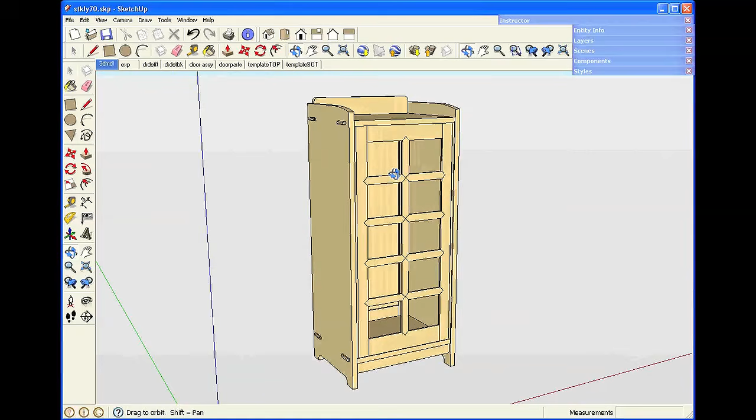In this session, we're going to learn about SketchUp. We've been using SketchUp at Popular Woodworking Magazine for a few years now, and it's really been a fantastic tool for us. We use it to plan projects before we build them, and as a basis for illustrations you see in print in the magazine. It effectively lets us build things twice. We build it in the model, we can visualize how things go together, see it in 3 dimensions, come in close to get details, and check the sizes of parts. We can do all of this before we ever cut any wood. It's fast, it's efficient, it's made us better woodworkers. It's a tremendous visualization tool, and it's also a wealth of information.

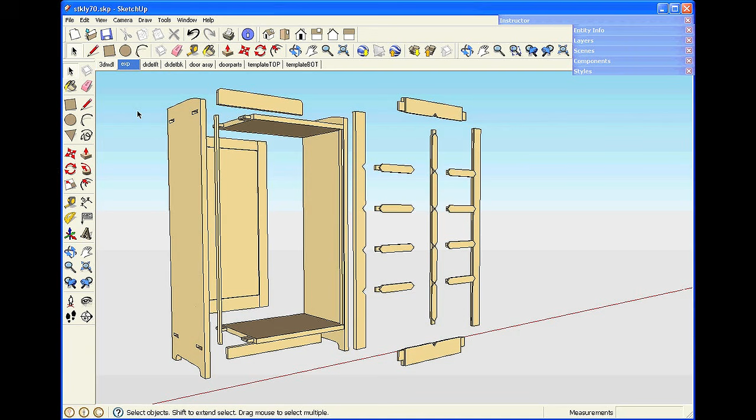In this cabinet, I know the size of every piece and every part and how all the parts fit together. I can also use the information in the completed model and generate a number of different views. All of these views are fast to make because I'm not drawing anything over, I'm simply pulling parts from the completed model. This exploded view, for example, was made by copying the model and then moving the parts around. I can also take a close look at details and share these, seeing from the front and the back, and again this doesn't take much time. I'm just taking snapshots of different parts of the model and different points of view.

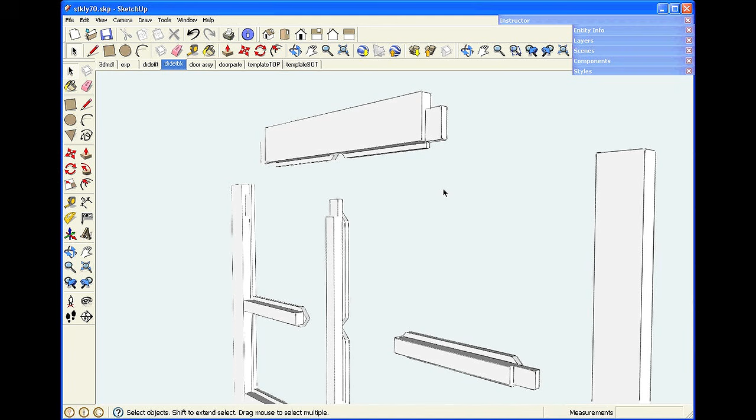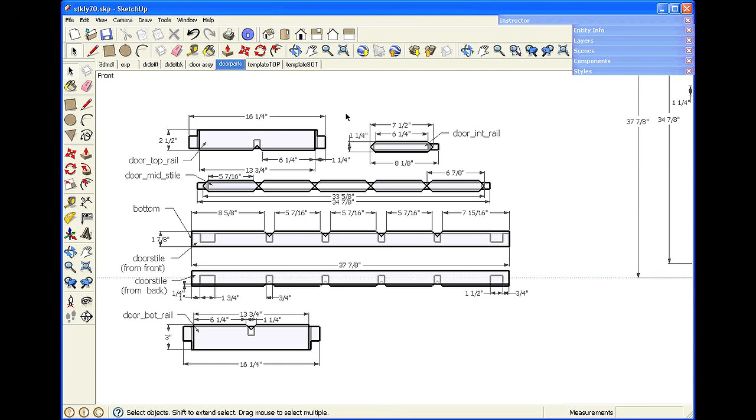When it comes time to head to the shop, I can generate and print out detailed drawings with dimensions, such as this showing the door assembly. Because I have all of the parts saved in the file, I can also pull parts into another sheet, print that out, and I have a cut list showing all the parts, all the dimensions, where the joints are, what size they are. It's a tremendous tool to help build efficiently and to build accurately.

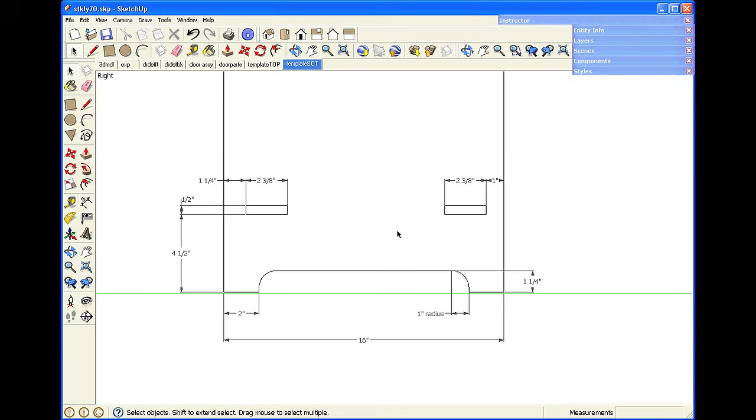Another great use we've found is to make full-size templates. This is a close look at the bottom of the cabinet. If I print this at full size, I can get the shape of the side, I can get the through mortise, I've got the locations, I also have the sizes of them. I can print this at full size, take it out to the shop, glue it down to a piece of wood, and make a template to make these parts accurately.

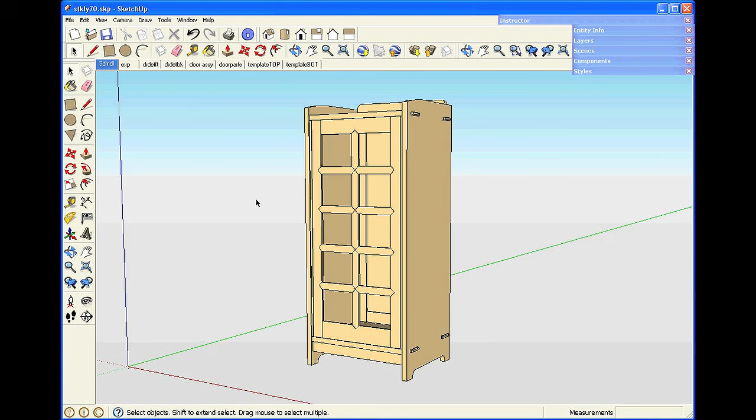All in all, SketchUp has made us better woodworkers, and we think every woodworker can benefit from learning how to use this program. That's the good news about SketchUp. The bad news is it takes a little while to learn, and you have to practice it. SketchUp is a fairly intuitive program, but there are some quirks to it, and sometimes the obvious ways to do things aren't the most efficient ways. What we're going to do in this series of videos is share with you the things that we've learned so that you can model efficiently and accurately.

One of the first hurdles to overcome when you're learning SketchUp is you need to learn 2 distinct sets of skills. You need to learn how to draw, but you also need to learn to navigate around your drawing. It's difficult to learn how to zoom and pan and orbit while you're learning to draw. A lot of people get slowed down by this. They become reluctant to zoom because they're trying to model at the same time. So one of the things I've found is you're better off to get an existing model, and spend some time navigating around that before you begin to learn how to draw.

There are several sources online for models. You can go to sketchup.google.com, and you can also go to popularwoodworking.com/SketchUp. You can even access models within the SketchUp program. If you go up to the File menu, click on 3D Warehouse, and Get Models, you'll be connected to this online resource. In the search box, you just type in a term. I'm looking for a hay rake table that we featured in Popular Woodworking Magazine a few years ago. The search comes up, and I'm presented with a model.

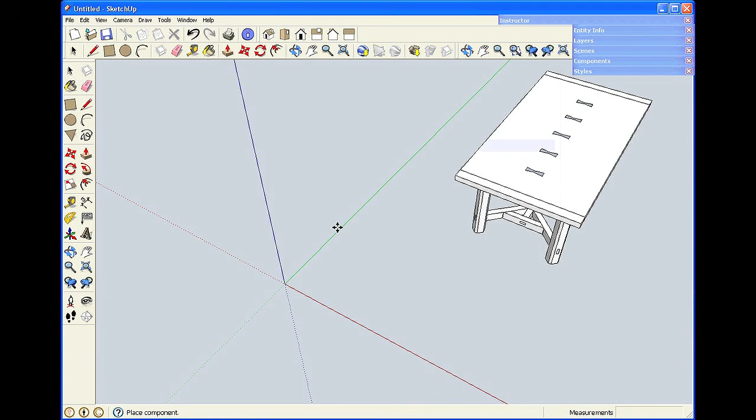I can take a preview of it in 3 dimensions, and I can download it by clicking the tab that says Download Model. It'll ask me if I want to load it directly into the SketchUp model, and when I click Yes, that window closes and the model from the 3D warehouse appears. Now I've got something to look at.

I can practice the navigation skills in SketchUp. One of the curious things about SketchUp is that the obvious ways of doing things aren't always the best way. The navigation tools are up here on the toolbar. There's Orbit, Pan, and Zoom. And it seems like that would be the simple way to access them, but there's a better way.

If you have a 3-button scroll wheel mouse, the scroll wheel contains all of the navigation functions for SketchUp. If you roll the wheel up, it zooms in. If you roll it back, it zooms out. If you press down the scroll wheel and move the mouse around, then you orbit. You can see things from underneath or at any angle. And if you hold down the Shift key while you're orbiting, that invokes the Pan command, and that lets you move back and forth.

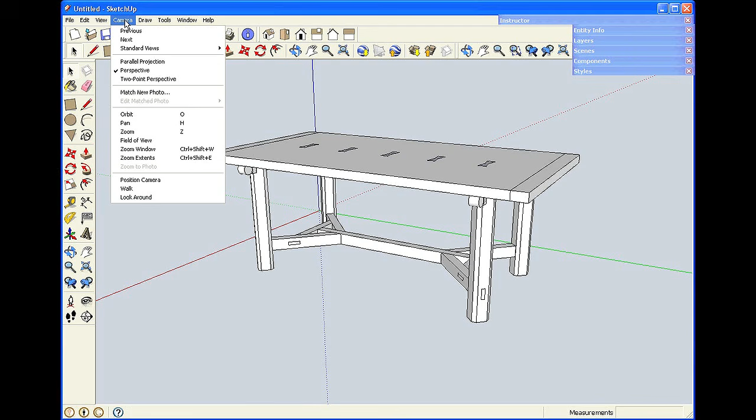The navigation tools are also under the camera menu. And this is a slow way to get there, though. You really need to work on the skills to use the mouse functions to be efficient.

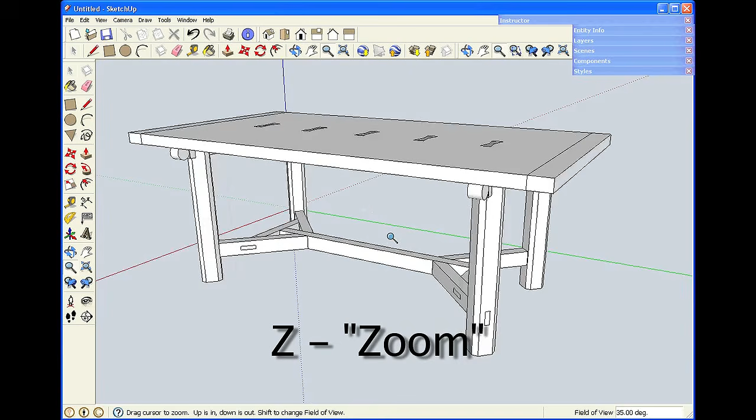There are also keyboard shortcuts for the navigation commands. O for orbit, H for pan, and Z for zoom. Now, one of the things while you're in a navigation command, if you right click, a menu pops up and the other commands become available.

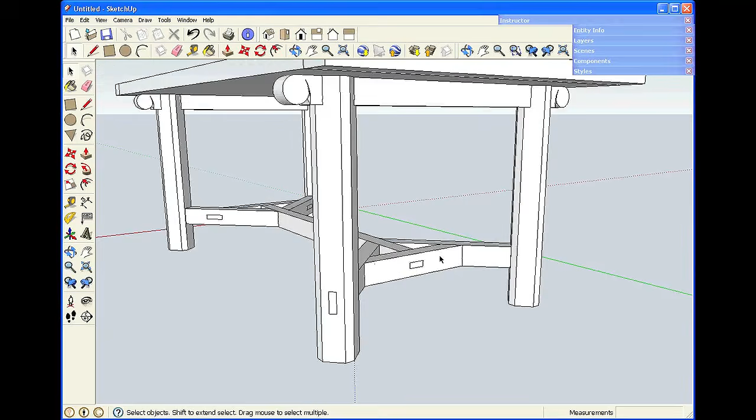The other thing about the navigation commands is they're transparent. You can use them in the middle of moving something or drawing something. This is an important feature because often you need to come in very close to click on a specific point and then back out to see more of the model.

One of the other features on the toolbar is Zoom Extents. If you're in close, you can get lost in the model sometimes. Zoom Extents backs up your point of view to see the entire model.

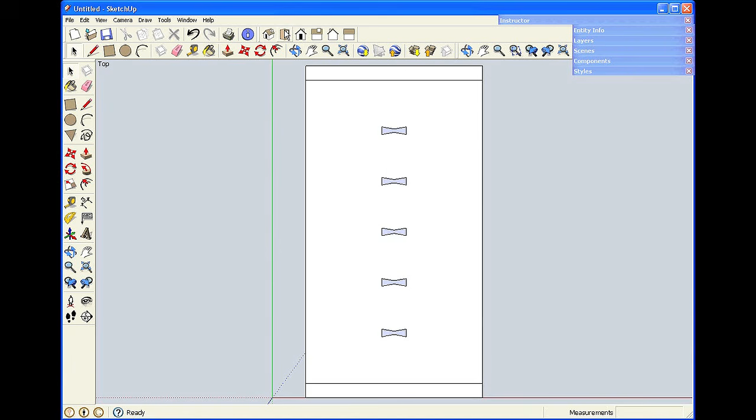Another feature is the standard views. These are familiar if you're used to 2-dimensional drawings. This is a plan view and a front elevation and a side elevation. You also have an isometric view available.

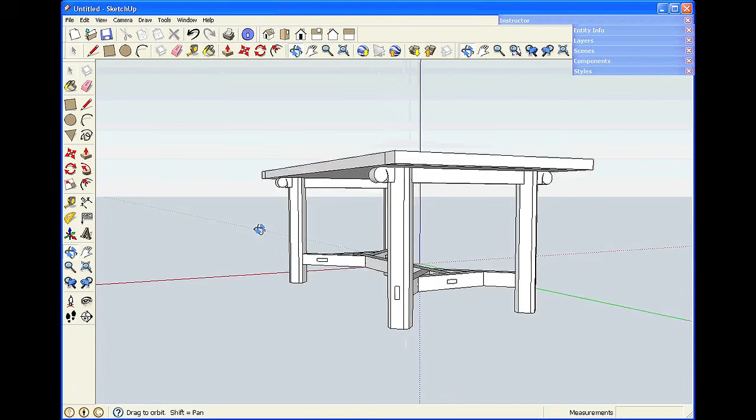So I suggest you get a model, spend a half hour or so working your way around it. Look at it from different sides, zoom in to take a look at details, zoom back out, and pan around. When you're comfortable with how to get around a model, then you can start learning how to draw.

To model efficiently in SketchUp, you need a thorough understanding of the basic controls, how things are made, and also how the program works. Let's start by understanding what we're seeing on screen and what the SketchUp world is really like.

This darker area is a flat horizontal surface. It's called the ground plane. These 3 colored lines are called axes. The blue axis is a vertical direction. The green and red axes are horizontal directions. Directions in SketchUp are referred to by colors because as you spin around, you can change, and what was right and left now becomes front and back.

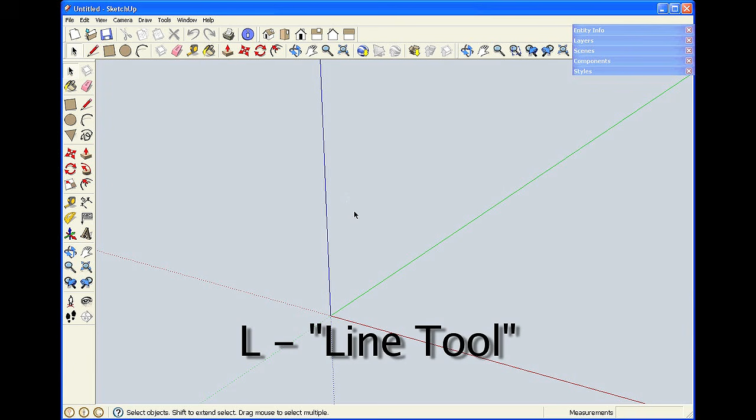The basic tool for drawing is called the line tool. It's represented by a pencil. You can pick it from the toolbar. It's also under the Tools menu, and there's a keyboard shortcut, the letter L. You click on a point to start a line, go out a certain distance, and click again to stop it.

One of the things you may notice is the line is a red color, and a little tag appears that says from point or on red axis. And those are aids in the program that help me keep in the right direction.

The reason that this is important is everything in SketchUp is in perspective because it's in 3 dimensions. This rectangle really has square corners, but because I'm looking at it in perspective, it doesn't appear that way. If you have a lot of experience drawing on a drafting board or in a 2-dimensional CAD program, this can get confusing when you work in SketchUp because your hand and eye coordination is probably trained to draw what looks square to you on the screen.

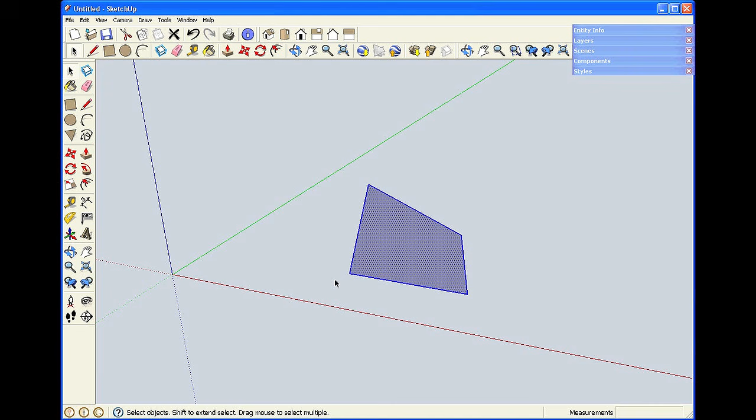If you see a black line, that means you're not parallel to the axis and you're somewhere out in space. And it can be very confusing, and you'll make very odd shaped things that don't match what you want to make. So as you draw, take your time, let these tips appear. Watch for the colors to see that you're on axis. Pretty soon your hand and eye coordination will adapt, and you'll get used to looking to the colors without thinking about them.

The other aid, and you can see these appearing, are called snap inferences. When I approach the end of a line or the middle of a line, a little dot appears, and that lets me know I'm going to be drawing exactly from that point. As I move along, a little tag appears letting me know I'm on axis. When I get above another point, it shows me that I'm matching up to it.

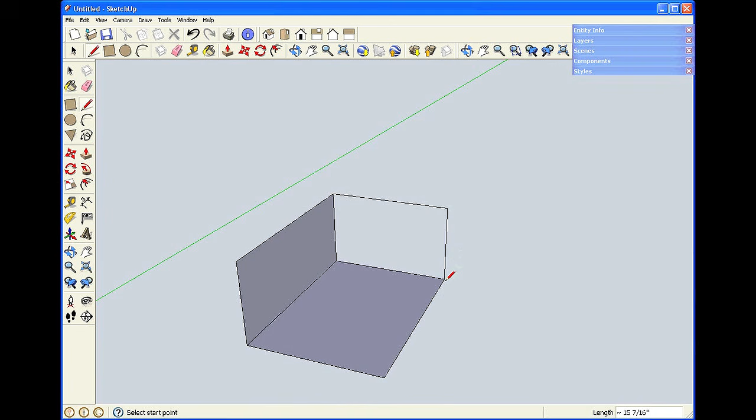That lets me draw a nice square straight line.

Another important feature of the program is called the measurements window, down in the lower right hand corner of the screen. As I draw a line to control the length, you'll notice the numbers change as the line gets longer. What I don't want to do is try to jiggle the mouse and hit a certain number. Instead, after I start drawing, I simply type in a measurement and hit the enter key. As I start the line, just type, I don't have to click in the window or anything, and hit enter, and that makes the line the correct length.

This is important because other features, such as moving, depend on an accurate number in the measurements window.

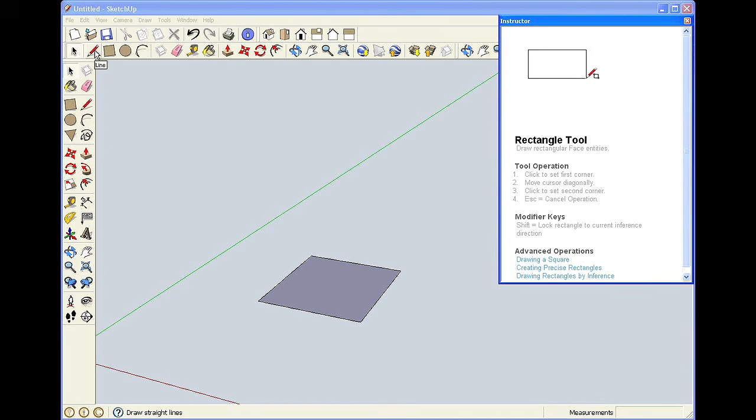One of the good features of SketchUp when you're beginning is the instructor window. From the Windows menu, I click and open the instructor window. It describes and tells about the operation of each tool you select. As you change the tool selection, the instructions change also, giving you basic information about how each tool functions.

The select tool is important because for a lot of operations, such as moving an object, it's better to select it first. To get a single object, you just click on it and it turns blue. If you click another object, it deselects the first one. To select more than one object, you hold down the Shift key. You'll see a little plus and minus sign appear by the cursor, and that lets you add to the group. When you have the whole group, you can move them in one shot.

You can also select objects by drawing a box around them. There are two distinct ways this function works. If I draw a box from left to right, everything that's entirely in the box is selected. This is called a bounding box. As you can see here, I don't have the entire square, only these two lines are selected. This helps later on to select certain points.

Now if I come the other way, from right to left, with a crossing box, it selects anything that touches the extents of that box.

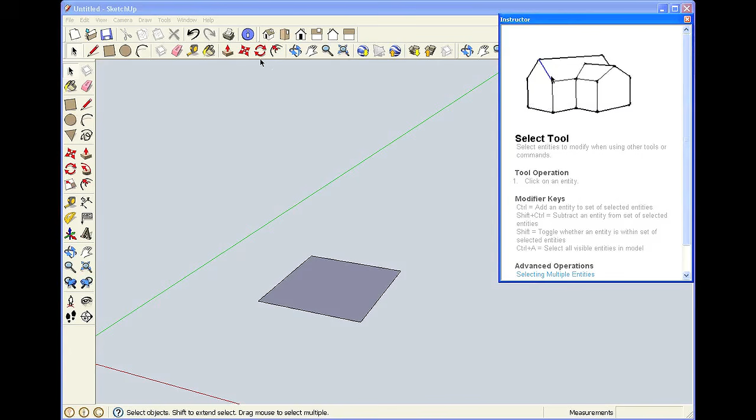Looking back at the instructor window, if I click on the title bar, it collapses and doesn't take up space. If I click the red X, that closes it, and I'll need to return to the window menu to display it again. I recommend keeping it handy as you learn, and when you get to different commands, you can open the window up and explore what the function is.

Now within SketchUp, no matter how complex an object is, it can only be one of two things: it can either be an edge, which we also call a line, or it can be a face.

Edges or lines have a length, but they don't have any thickness. When you enclose an area with lines, it forms a face. The face is the area in between. Now the face depends on the lines to exist. If I take one of the lines away, the face ceases to exist. If I redraw the line, it comes back.

Now that I've drawn some things, I need to know how to remove things as well. There are two separate ways. Again, the obvious way, it looks like the eraser tool would be the thing to use. The eraser tool, however, is a little difficult to use. There's a tiny pick box on the end of it, and an object needs to be within that little box to be erased.

The other oddity of the erase tool is that it only works on edges, it doesn't work on faces. So to remove a face, I use the alternate method for deleting an object, and that's the select tool. Select it with the select arrow and hit the delete key. Often this is quicker and easier than using the eraser.

When you first install SketchUp, you only have a minimal amount of tools available, and the program is set up for architecture rather than for woodworking. So we need to take a few minutes and get things set the way we want them so that we can operate efficiently. The first thing we want to do is set some preferences.

So we go to the Window menu and check Preferences. Now on a Mac, this procedure is a little bit different, you'll find it under the SketchUp menu. The first thing to look at in the list is Drawing.

Here we have click style, which controls the way lines are drawn. You may have a preference if you've used another graphics program. For now, I would leave it at Auto Detect and check Continue Line Drawing. More importantly, make sure you have Display Crosshairs checked. This puts a colored indicator for the axis direction on your mouse cursor as you draw, and this is a tremendous help for keeping on track.

The next thing to look at is OpenGL. If you have an older computer and you're having problems with your video display, checking and unchecking these boxes can help with that. The last thing to look at is the template.

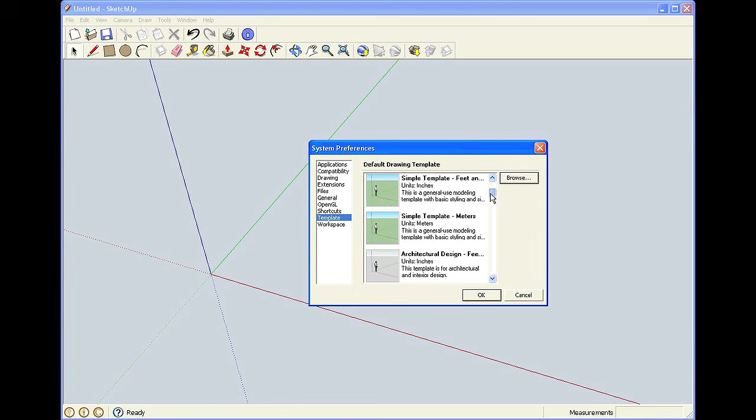The templates are sets of dimensions and the way the background displays for different applications. Most of these are for architecture, Google Earth, or engineering. We want to scroll way down the menu, find Product Design and Woodworking, with Units in Inches. Click OK, and that saves the system preferences for us.

Next we'll look at Window and Model Info. In here we want to look at the Dimensions window. Later on when we get to Dimensions, this is where we can pick a font, a style for the arrow, and how to align dimensions.

Down at the bottom is Units, and we want to set this for fractional. Architectural is feet and inches, decimal is in hundredths. Generally in woodworking we want to stay with fractions. I set the precision to a 64th, and I uncheck Enable Length Snapping. When we get to working with angles, we may need to change these settings, but for now 0.0 is okay. Then we can close the Model Info window.

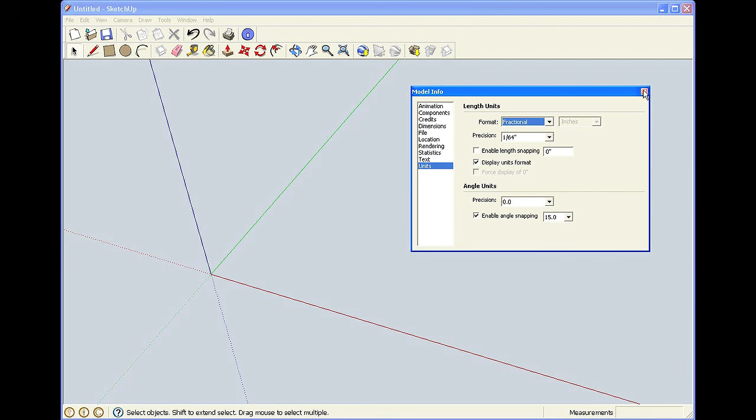Of course, as woodworkers, we need as many tools as we can possibly get. So up at the View menu, under Toolbars, here's a large tool set. This includes more tools than we have available when we first start out. We also want to select the Camera toolbar, which includes some zoom features and functions.

The Views toolbar - these are the little houses that'll give us standard views. Now on a Mac, this setup is a little bit different. You want to look for Customize Toolbar, and that will give you the option to drag groups of icons to your toolbar and set them up the way you want them.

The other feature of SketchUp is windows and palettes that we can open and use as we work with the program. First of these is Entity Info. Then we want to select Components, Styles, Scenes, and Layers. Now we won't use these right away, but it's nice to have them available.

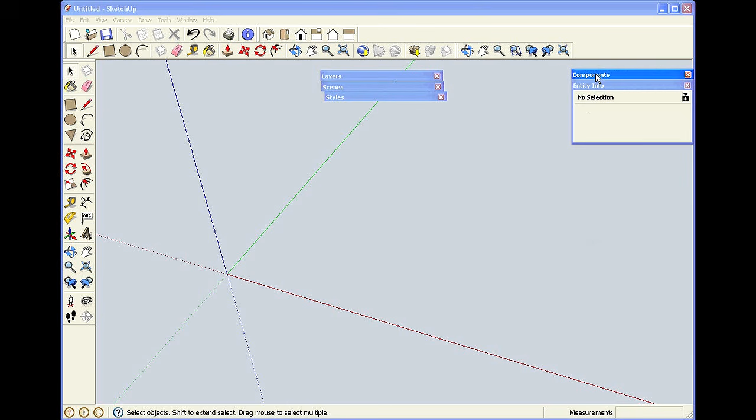With these windows, if you click on the name tag, they collapse, and you can move them around the screen. They'll also stick to each other, so I put them together as a group, leaving them in the upper right hand corner of the screen.

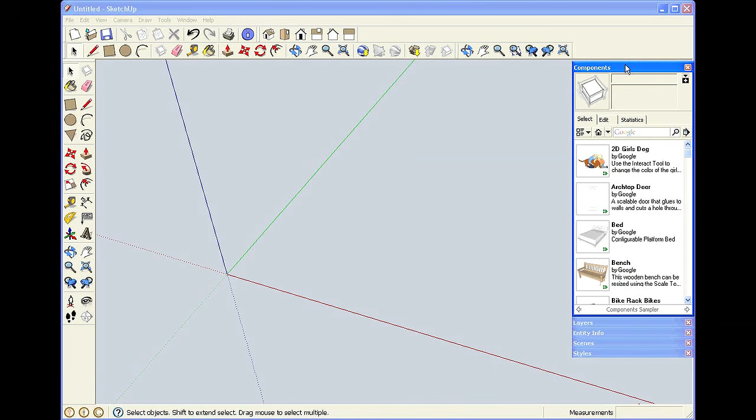To use one, you click on the name, it opens up. You can explore the options, work with what's in there, and then tuck it back out of the way.

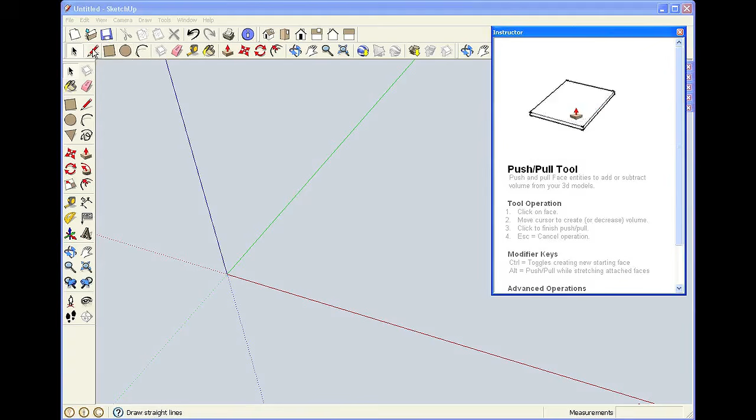The most important window at this point in learning the program is the instructor window. We mentioned this before, but it's nice to leave available. It will tell you with each tool, as you select it, how it works, as well as available options for using the tool. The blue titles down here take you to online help if you're connected to the internet.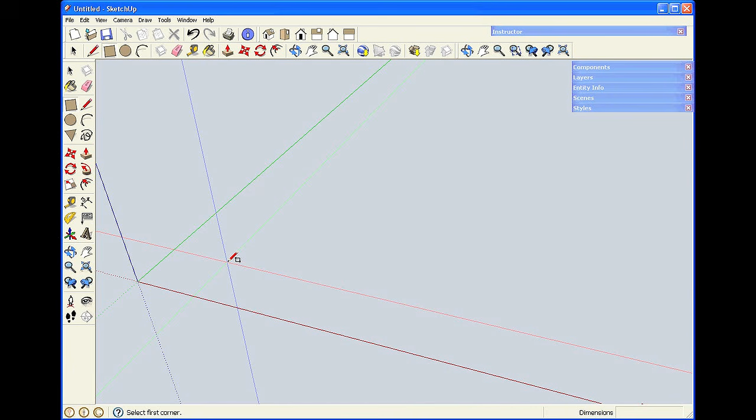Now when I make a rectangle, I want to watch for the same things I did when using the pencil. I click on a start point. I want to keep my axis references together. I also want to be able to control the measurements. I can do this down in the dimensions window, but because I have both width and length, I need to type two numbers - the first number, then a comma, then the second - and that gives me a rectangle the size I want.

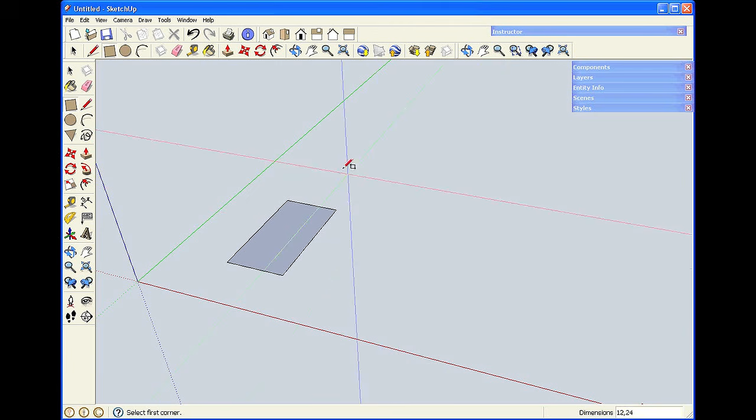The same direction inferences and snap inferences also apply with rectangles as they did with the pencil. But I'm drawing much faster because I'm drawing several lines in a face at one time.

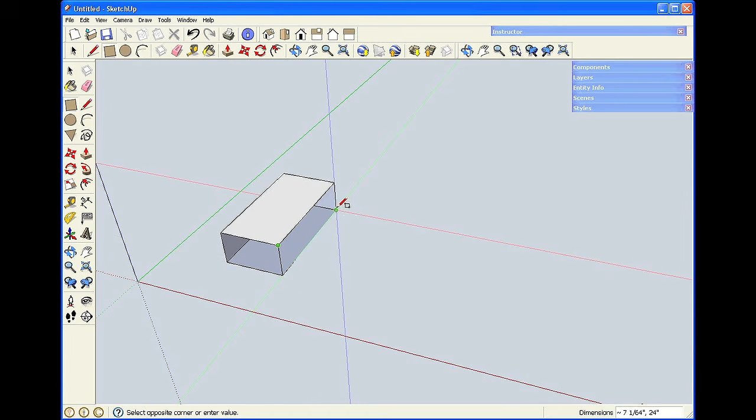This basic box shape is the key to making things in SketchUp. It looks like a piece of wood, and we can do it with the rectangle tool or with the pencil. But just as the rectangle is more efficient than the pencil, there's another way to make a box that is even more efficient.

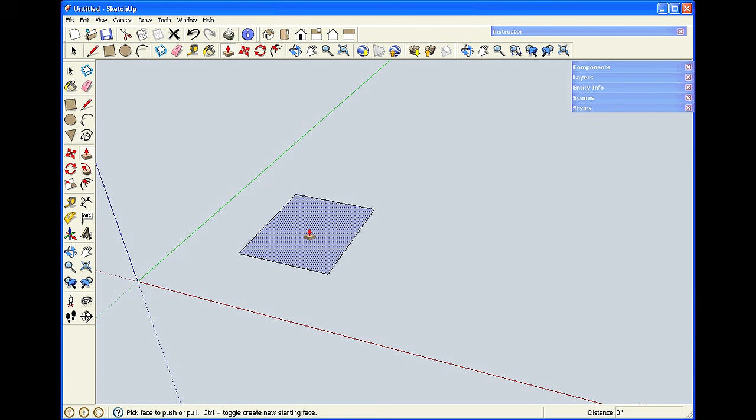This is a tool called push-pull. I get push-pull, I put it over a face on the model, and then click and drag the mouse.

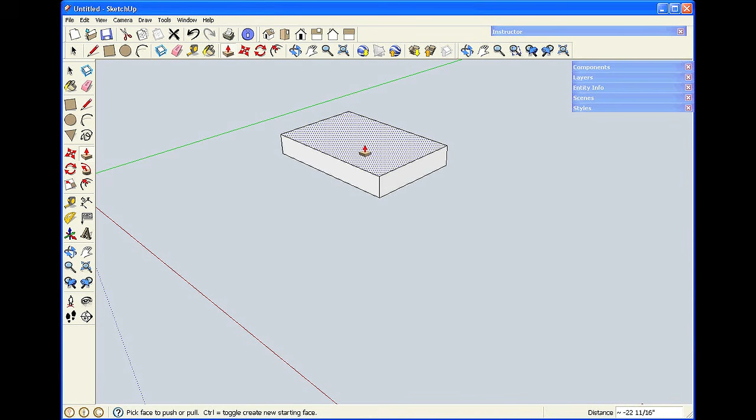This makes a flat rectangle into what looks like a solid object. I can also use push-pull to change the size of something once I've drawn it. I can stretch it in length, I can shorten it, I can make it taller, I can make it longer.

Push-pull will only go in the direction that's 90 degrees to the face I select. Again, there are inferences for snaps and directions within the program that will help out.

For example, I want to make this rectangle into a box the same height as this one. When I take push-pull, it's locked into going vertically, so I can come over to the other rectangle.

When I see the references appear, I know they're going to be the same height. I can also control the distance of an extrusion by typing a number in the measurements window.

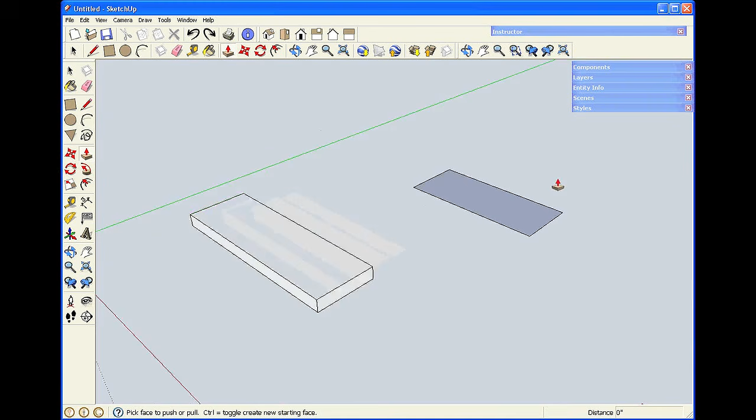Once I start, I head in the direction I want, hit the number, hit the enter key, and it makes it the desired length.

Now, one of the early problems we need to resolve is everything that we've drawn is still a face or a line. This isn't a solid piece of wood, it's a collection of lines and faces.

So if I want to work with something, if I want to move part of it, it stretches what it's connected to. Everything in SketchUp, when it's an individual object, is sticky.

This edge is attached to these faces, so if I move the edge, the faces stretch with it. Sometimes this can be handy, but most of the time it's not what we want to do.

It particularly gets to be a problem if I want to put one piece on top of another one. I can select it and move it.

When I go to move it again, it's stuck to the piece below it, and it stretches it out when I try to move it. The way to overcome this is by combining objects.

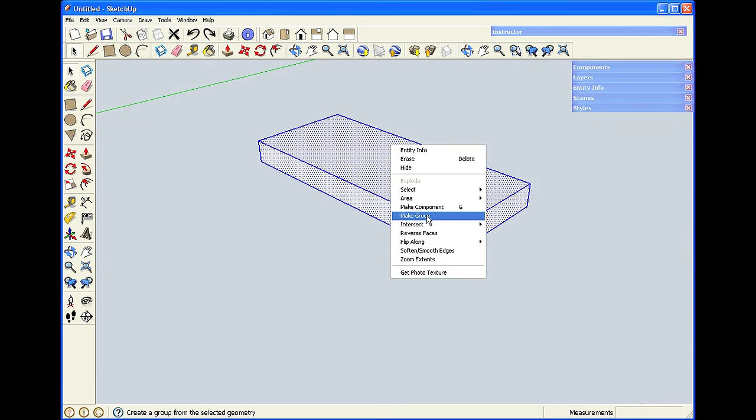After I have a group of objects selected, if I right-click, this menu pops up, and Make Group is one of the options. Make Group combines the objects.

When I click on it now, instead of just selecting a single face or an edge, it selects the entire object. This makes it easier for the program to think of things.

It's thinking of one block, much the way that we would think of one piece of wood, instead of a collection of individual lines and faces.

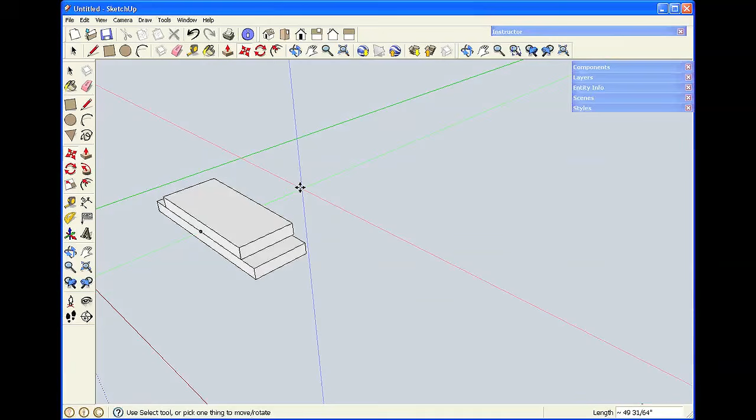The other feature of groups is they don't stick to anything except each other. So now I can move things independently.

Which brings us to the functions of the Move tool. Moving is very important and it's used very often. This is the icon on the toolbar.

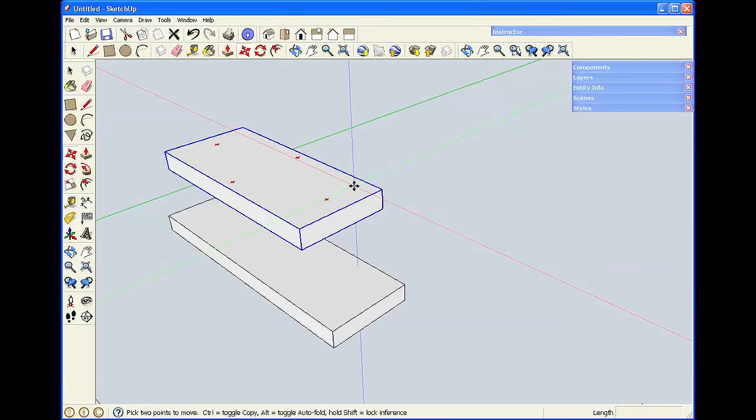You can also start it by typing the letter M on the keyboard. When you have the Move tool active, if you click on an object, it'll move.

It'll go along the axis directions, and the points within it also will snap. One caution with Move is these little red crosses.

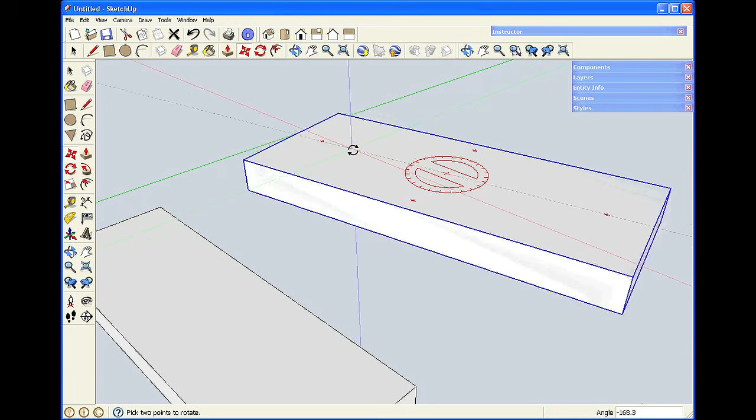If you click directly on one, Move becomes Rotate, and things will spin around, which probably isn't what you want to do at this point.

There are also two ways to start the Move tool. The first is to type the shortcut or select the tool from the toolbar, and then select an object. The other method is to take the select arrow, select the object first, and then click the Move tool.

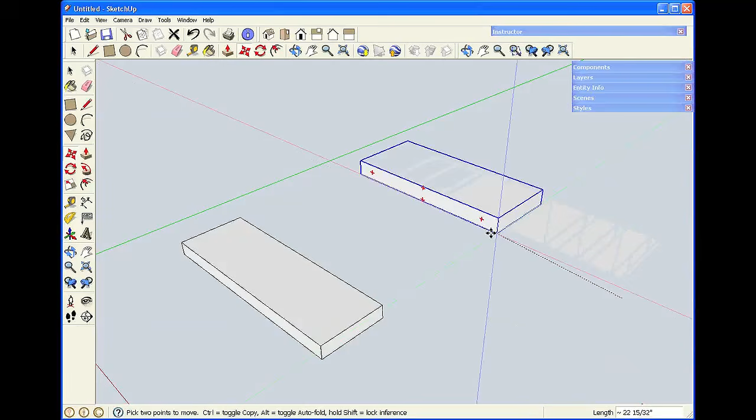Selecting first gives you more control. If, for example, I want to move this line and I select the Move tool first, it may select the other one. I don't have good control over it.

But by selecting first, now when I start the Move tool, it's only going to move the line that I selected.

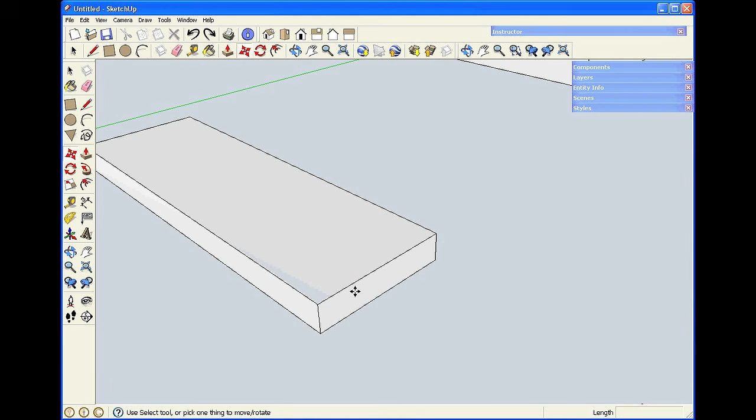When we're in the shop, it's a good idea to check measurements as we work, and it's also a good idea in SketchUp. This tool is called the tape measure, and it does just what its name implies.

I can click on a point, move the cursor to another point, and it'll tell me what the dimension is. This number also appears down in the measurements window.

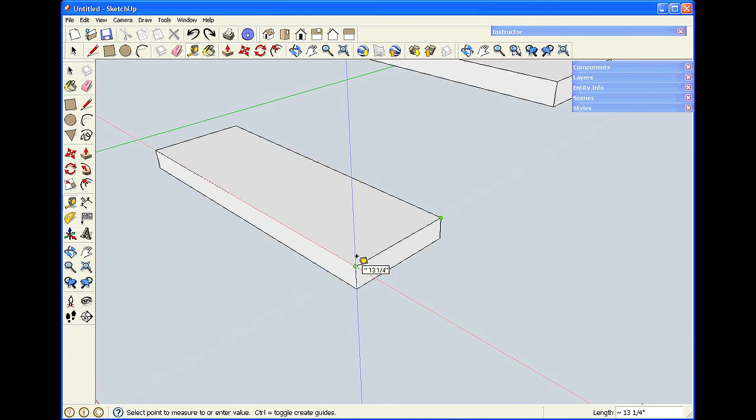I don't have to click again to get a number to display. If I just hover the cursor over a point, it will tell me. However, if I do hit enter, the number will appear down in the measurements window for me.